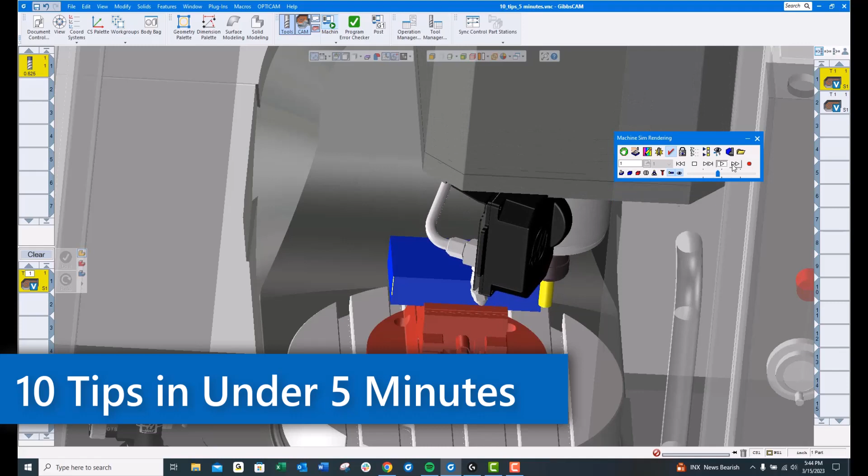Tip number 1: under the Help menu, About GibbsCAM, you can find the version of GibbsCAM you're currently using. Useful information when contacting your reseller for help.

Tip number 2: Icon size. These icons will come in rather small by default. You can right-click next to where it says Mill here and choose Large Icons. This is definitely my preference.

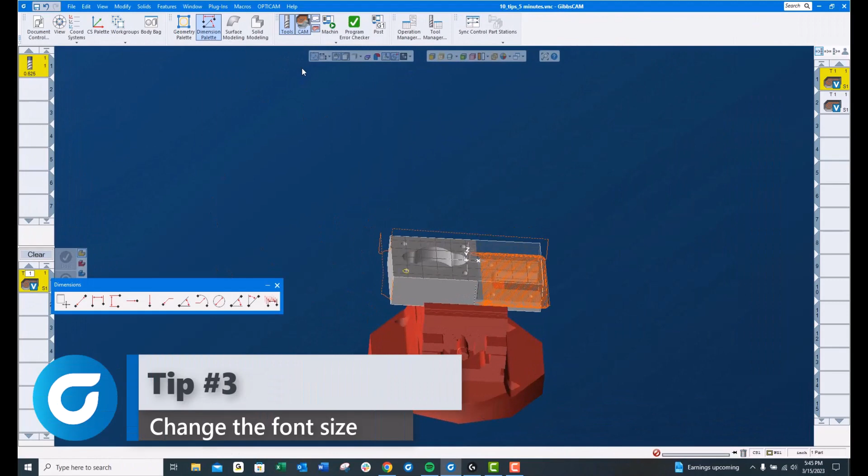Tip number 3: font size. You can see I dimensioned this hole here and the font is rather small. If you right-click on the dimensioning palette, set font, 25 is the setting that I prefer. Much better.

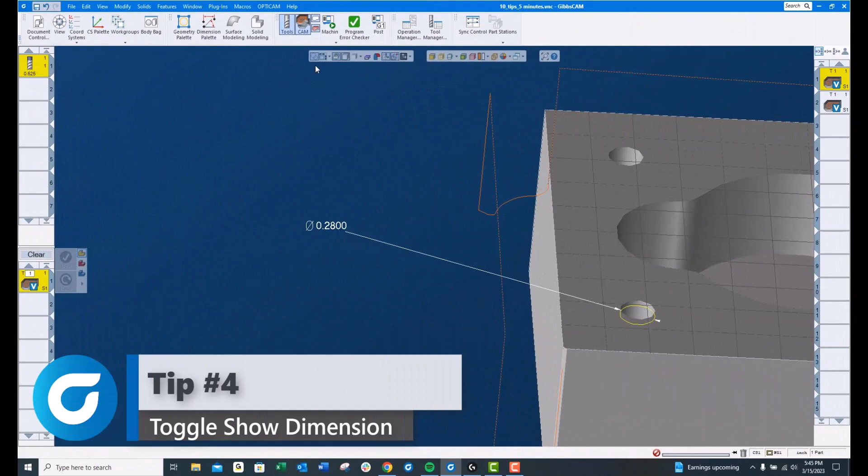Tip number 4: you can hide that dimension rather than throwing it away. The second icon from the left on the first floating toolbar will toggle those dimensions on and off.

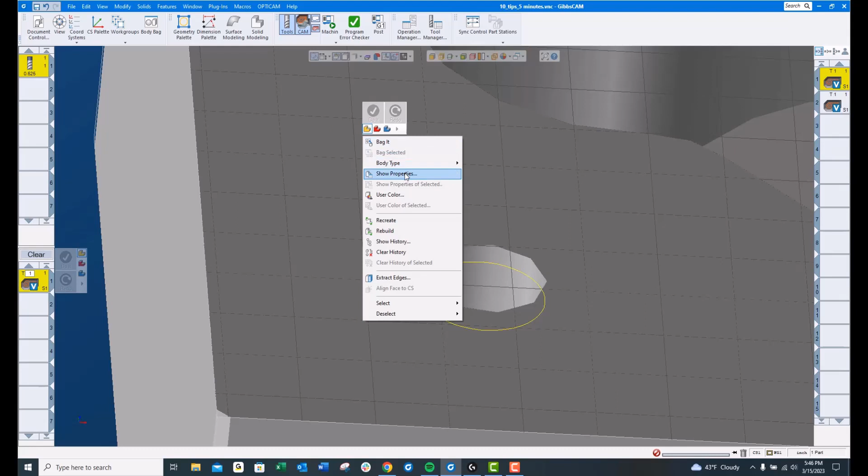Tip number 5: if we zoom in on this hole, you'll see it looks more like a stop sign than it does a hole. If you right click on the model, go to Show Properties, you can set your chord height to 1/1000, which is my go-to number. You must hit apply or it will not take effect. You can now see that hole looks much more like a round hole than a stop sign.

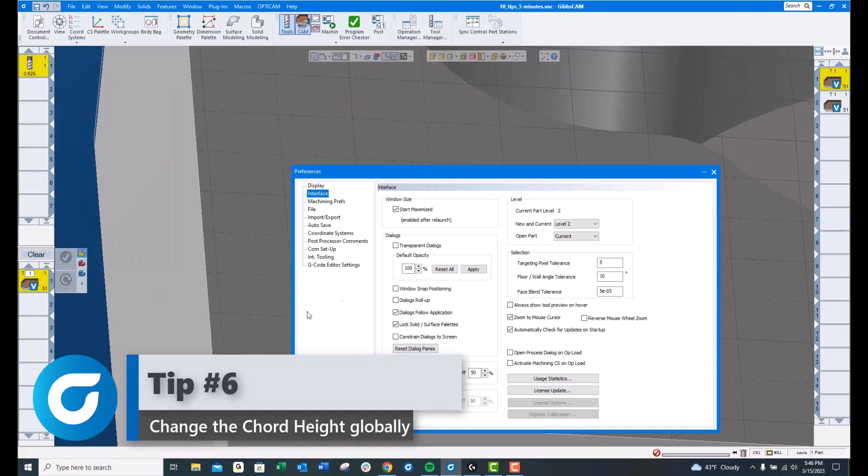Tip number 6: File, Preferences, under Display, Chord Height. If you change this chord height to 1/1000 and hit apply, now every new model that you pull in will be set to the 1/1000 chord height.

Tip number 7: I'll clear the workbench here and show you that when I double click this operation, it loads it over here. If I want to update the speeds and feeds or anything else, I need to double click it so that it pops open. I'm going to clear the workbench.

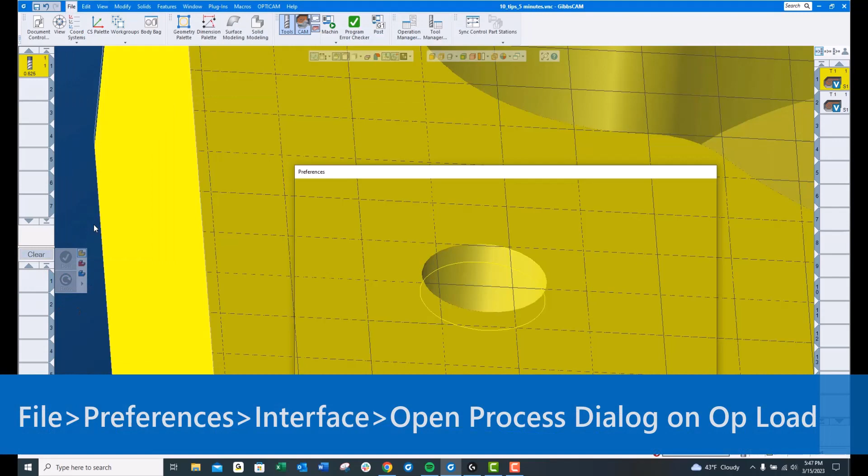If I go up here under File, Preferences, Interface, down here there's a checkbox next to Open Process Dialog on Op Load. If I click that, now when I double click this operation, it loads it over here on the workbench, but it also immediately opens it up for me and saves me one click.

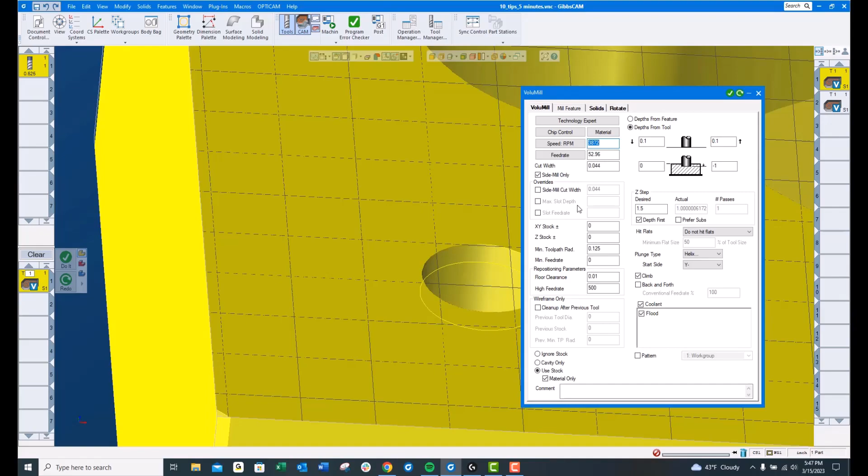Tip number 8: this is your draw axis. Oftentimes people like to customize where that's located.

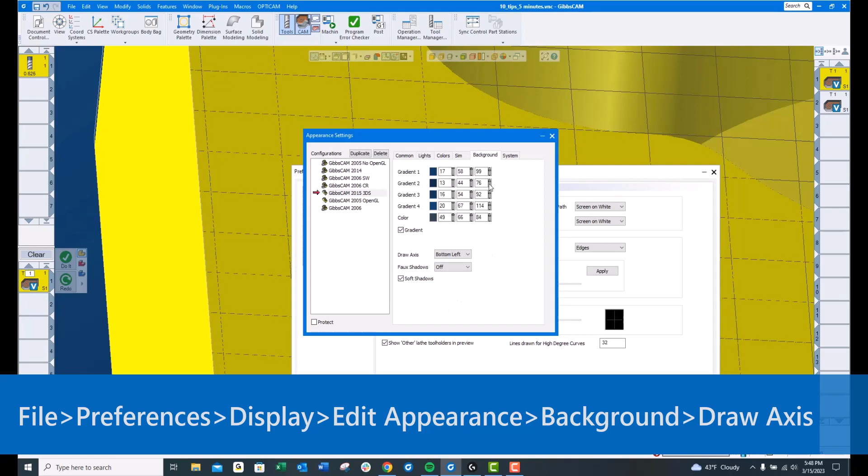Up here under File, Preferences, Display, Edit Appearance Settings, Background, you'll see it says Draw Axis. There's a little drop down here. Let's put it in the top left. You can see that it now moved to the top left.

Tip number 9: if you go online to the same location where we download the newest version of GibbsCAM, which is online.gibbscam.com, click on that software download, you'll see a manual, GibbsCAM 2023 All Manuals. I highly recommend that you download that. There's much more information there than in the Help menu of GibbsCAM. I have downloaded it and I keep it on my desktop for reference.

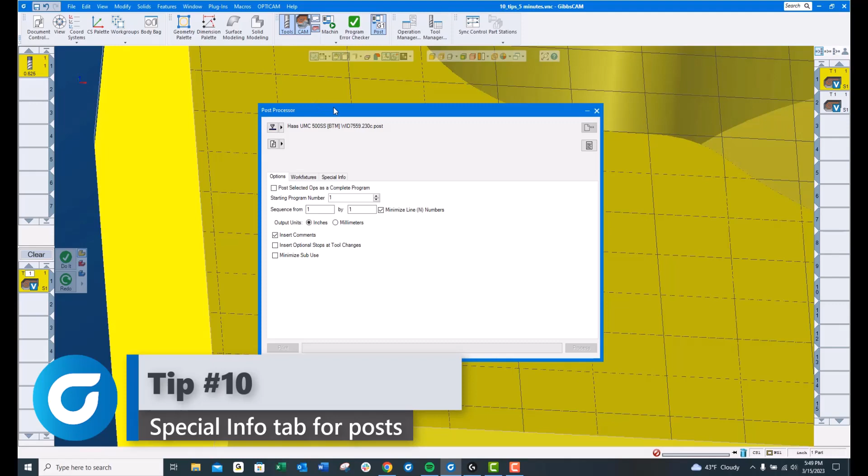Tip number 10: When you go to post code, if you have a more complicated machine, you may have a tab that says Special Info right here. If you click on that, there will be information provided by the post developer and or the post department that will help you program this machine quicker and better.